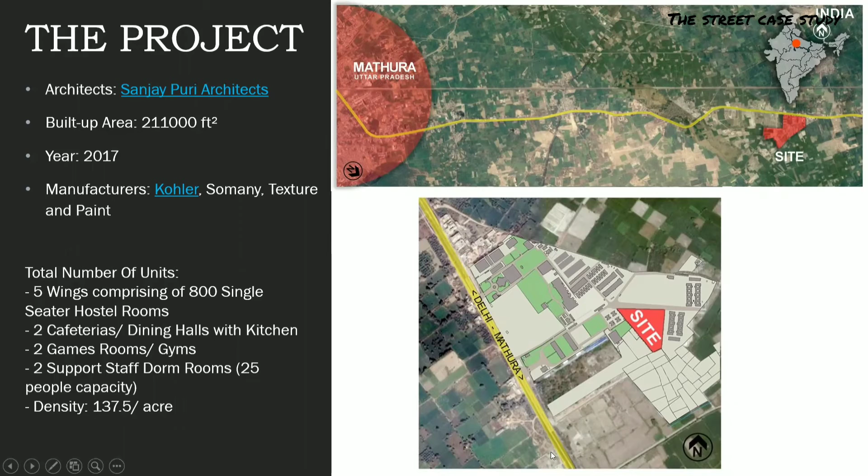Total number of units: 5 wings of 800 single-seater hostel rooms, 2 cafeterias, dining halls with kitchen, 2 game rooms, gyms, 2 support staff dorm rooms with 25 people capacity, density 137.5 acre. This is the Delhi Mathura highway. Over here our site is located.

Let's look at its site location and analysis. This is the sun path as per our site. This is the wedge-shaped site. Over here, southeast summer winds are flowing from this side, and northwest winter winds.

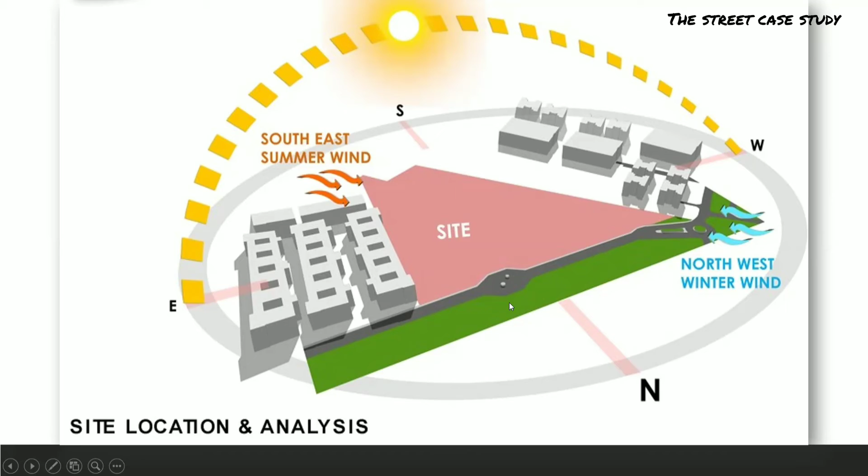Let's look at its concept. The layout follows the organic nature of the old Indian cities, with garden spaces increasing and decreasing in width, the hostel circulation spines being angled along their length. The site is wedge-shaped with buildings of repetitive character on both sides.

The client requirements necessitate a large floor plate, which could be done with a repetitive character using typical hostel room blocks. This is the typical Mathura street from where the concept was evolved. These are the basic hostel blocks.

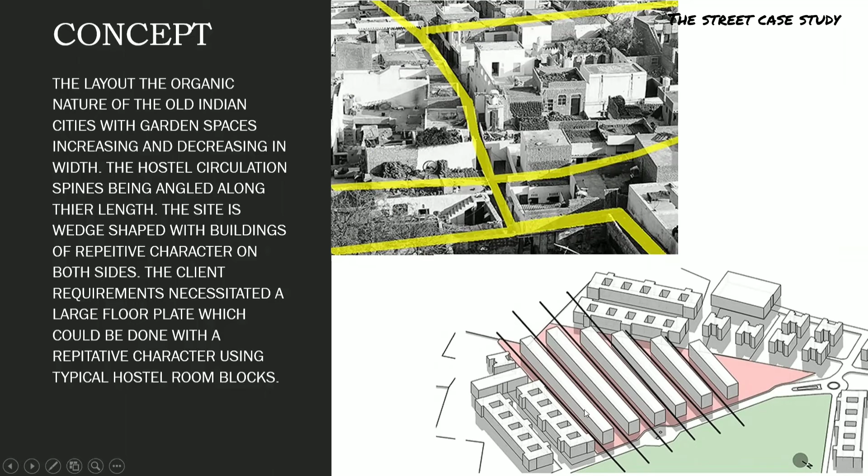Taking a cue from the old city streets of Mathura, linear low-rise hostels were twisted gradually across the site, creating an organic layout of the built form and landscape spaces. This creates individual spaces with a discernible identity in each part of the layout. The orientation of all the buildings is done with the view of generating large north-facing garden areas overlooking a vast playground. These are the conceptual sketches.

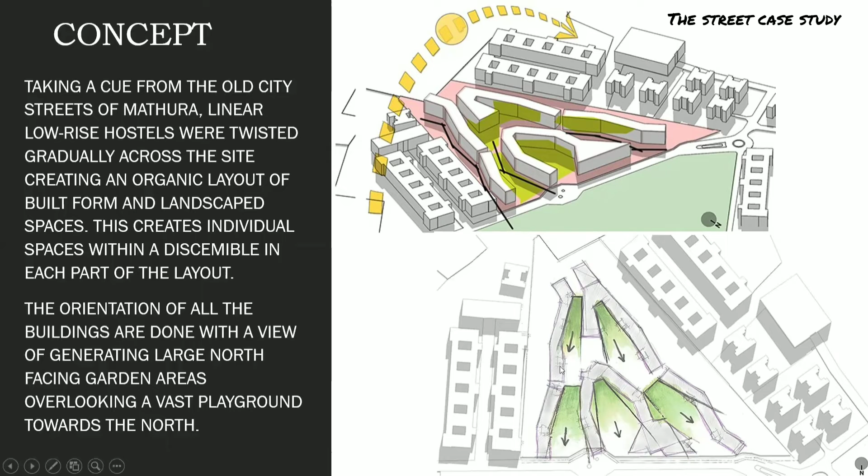Each hostel room is punctuated with a wedge-shaped window oriented towards the north and the playground, providing privacy and view. Varied shapes create identity to each area within, while the colors further accentuate each space. There are 2 large cafeterias with game rooms that form the focal point within the layout.

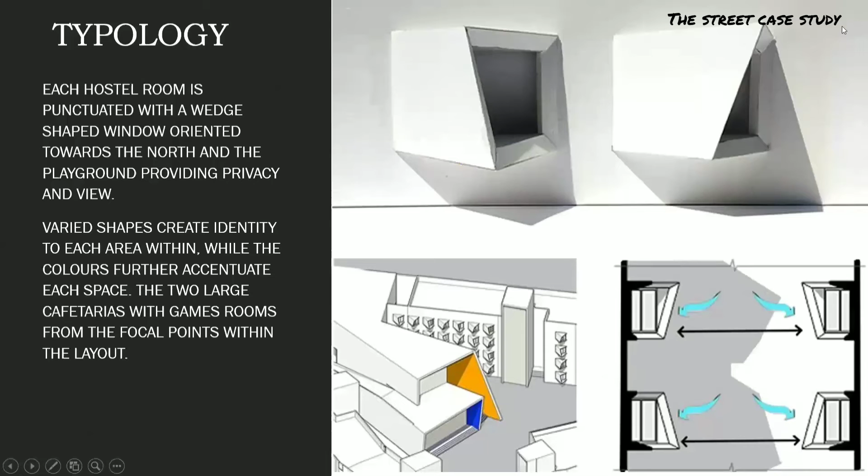Let's look at its typology. Taking a cue from the old city streets of Mathura, the city in India where this project is located, this 800-student hostel creates organic spaces designed in 4-level high, 5 linear blocks; the built-up space snakes across the wedge-shaped site, twisting and turning along their length. Sitting adjacent to the repetitive hostel blocks on the east and west, this new hostel within a large university campus creates individual spaces with a discernible identity in each part of the layout.

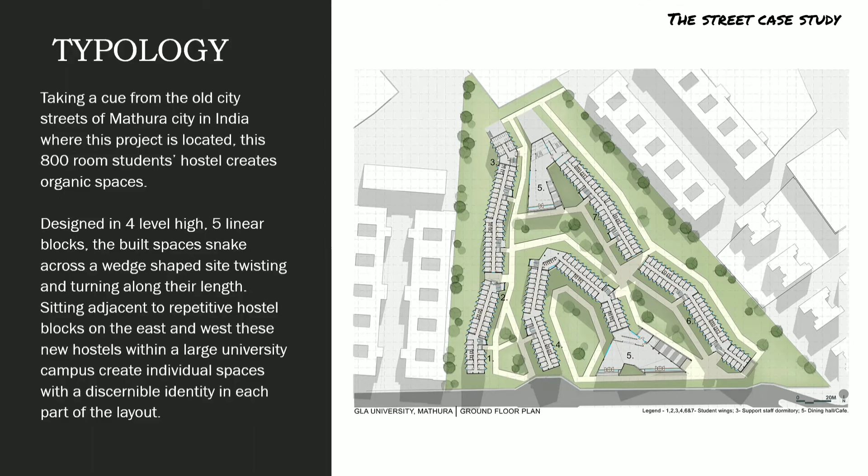The orientation of all the buildings is done with the view of generating large north-facing garden areas overlooking a vast playground towards the north. In addition, each hostel room is punctuated with a wedge-shaped bay window oriented towards the north and the playground. Each hostel room has a ventilation opening in the internal corridor facilitating cross ventilation. The linear buildings create small breakout spaces at each bending point, allowing natural light into the internal circulation spaces.

Over here, these are the entry points to the hostels. This is the dorm rooms for the staff. These are the game zone and gym. This is the dining area.

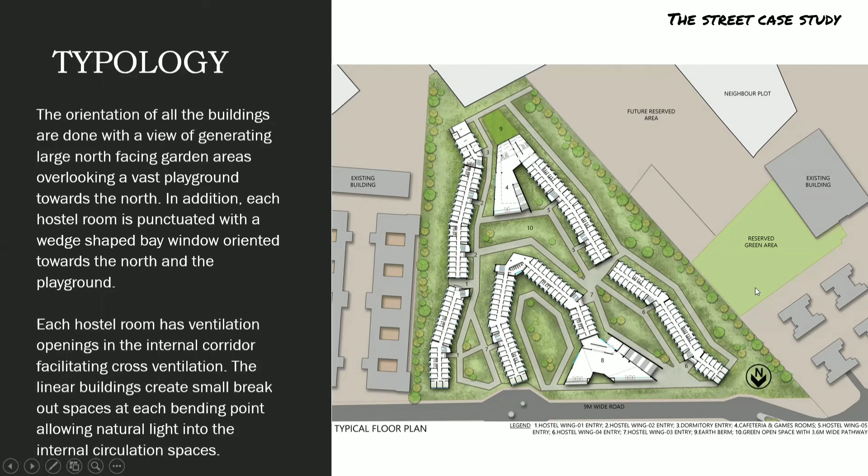This factor creates an energy efficient building, minimizing the heat gain in response to the climate, which has average temperature in excess of 30 degrees Celsius for 8 months of the year when the sun is in the southern hemisphere. Due to the north-facing window, sunlight is facilitated inside the rooms throughout the year. Two focal areas are created at the end of the linear building to house cafeterias, game rooms, and gymnasium, opening into the north-facing gardens and terrace. Each of the public spaces are large volumes with 20 feet high ceilings.

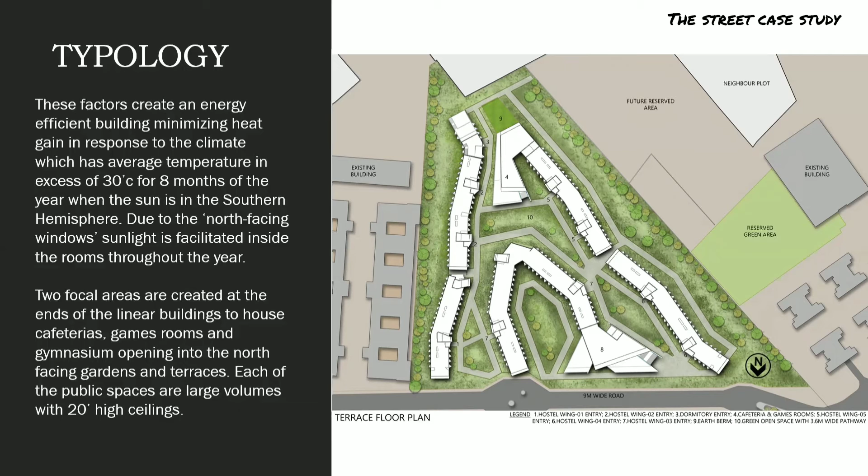The organic layout of the building characterizes each space within the site. Color accentuates different blocks and facilities within. Each block is differently colored, along with the internal face of the bay window of the hostel in bright colors, to create an identity. Rainwater harvesting, water recycling and use of solar panels additionally make the project more energy efficient, along with the orientation and the facilitation of natural ventilation.

The Street is contextual to the climate and the orientation of the site, thus creating varied shapes, experiences and changing perception of the space in each part of the 6-acre site. Over here, this is the service core from where the ventilation is available, and these are the linear blocks.

Let's look at the plan, a detailed plan. This is the entry, and this is the lobby area. These are the ducts, toilet area. These are the blocks. Over here the cupboard is provided with one bed and a study table. These are the north facing windows.

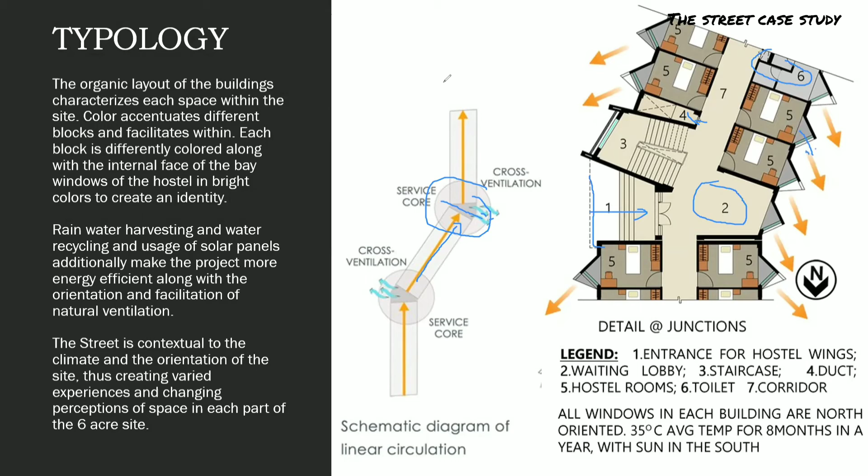This is the detail section of a particular wing. Over here you can see the bay window facing towards the north, which has a garden view. This is the corridor and these are the individual rooms. This is the site elevation of the building.

These are the sections of the buildings, where over here the mess is provided, the mess block, the hostel blocks, and this is the play area and gym area. Over here, this is the service core, and these are the hostel blocks. This is the entry point.

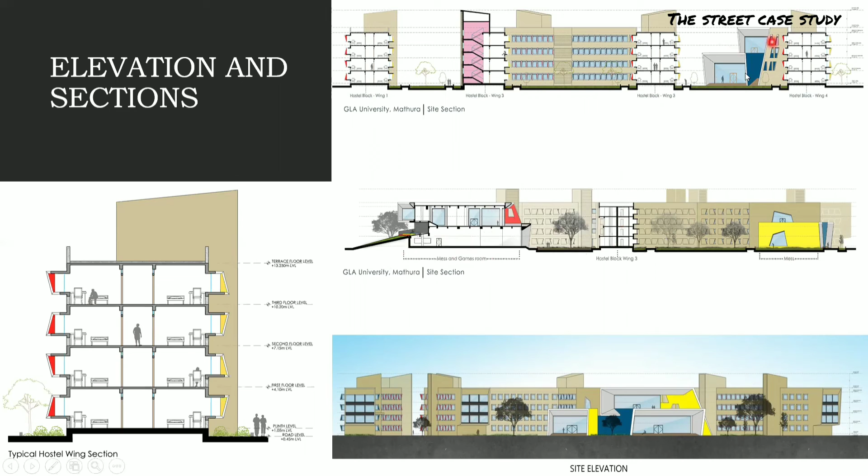The architect creates what they call a discernible identity for the project by marking each student room with a distinctive angular bay window that faces towards north, to capture daylight and heat in the winter months and limit heat gain for the remaining 8 months of the year, when the average area temperature is above 30 degrees Celsius. Louvers in each window provide sun shading while permitting natural ventilation, which is enhanced by an opening at the corridor for each room.

Overall natural air circulation is further encouraged by openings at regular intervals in each block, where the form shifts in plan. These irregular parts of the floor plan are filled with breakout spaces that provide natural light into the double loaded corridors. This is the isometric view of the building, and this is the front view of the building. As you can see, these are the cafeterias at the end and the playing area for the students, which doesn't have the bay windows.

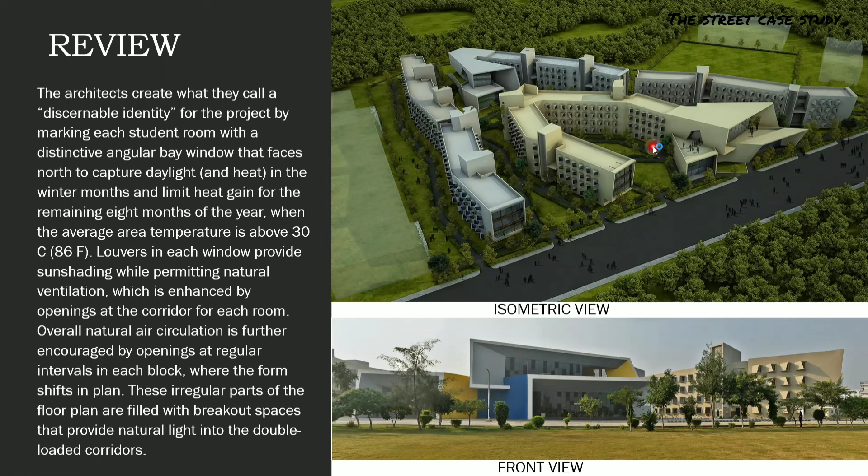Double height 20-foot tall cafeteria, game rooms and gymnasium are located at the end of the buildings, where they open directly onto the campus's large outdoor spaces. Canted rooflines reprise the bay window at the more public scale, marking this indoor gathering space while also sheltering monumental outdoor stairs from the elements.

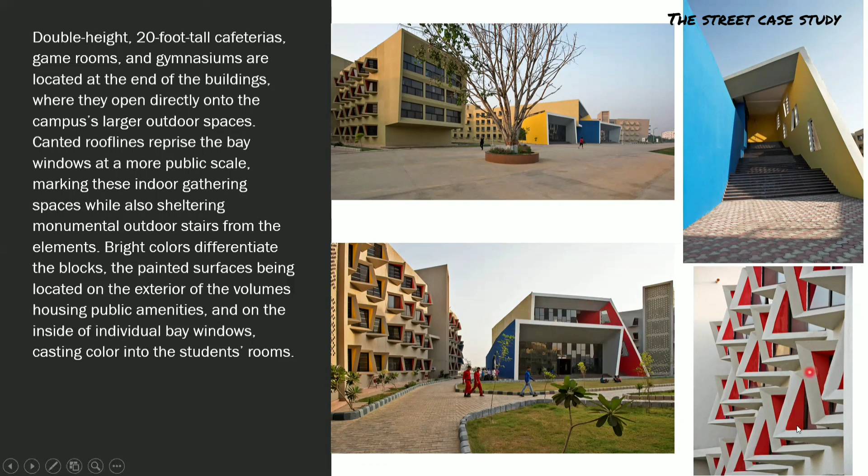Bright colors differentiate the blocks, the painted surface being located on the exterior of the volumes housing public amenities, and on the inside of the individual bay window, casting color into the student's room. This is the staircase for the public spaces. This is the front view of the hostel block. These are the colored bay windows. A few views of the buildings.